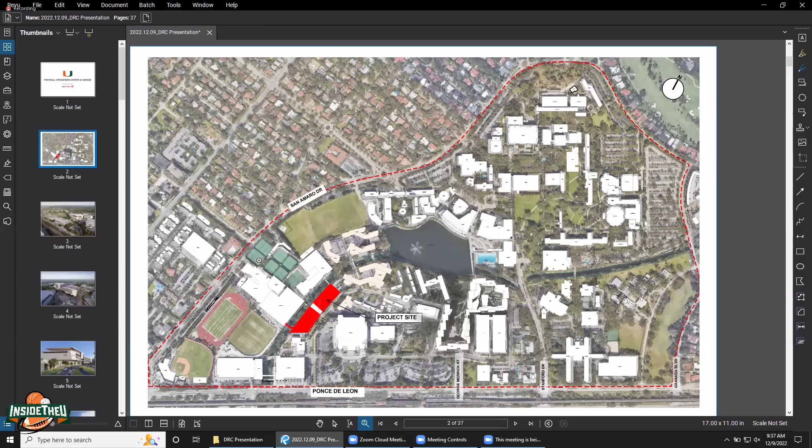So it's a very unique location, and it's a primary thoroughfare between offsite campus living and bringing those students to the campus. For us, it was an opportunity to create a visual connection or gateway, not just between the athletic side and this building, but also something that felt welcoming to students and pedestrians. Over time, we're trying to make the building or the campus as pedestrian friendly as possible, and this is another way of doing that and emphasizing that connectivity.

The other thing you'll note is that we are creating a physical connection back to the indoor practice field. That's something that is critically important for this project to function, being able for the student athletes, the football players, to directly connect to indoor practice football and the outdoor fields.

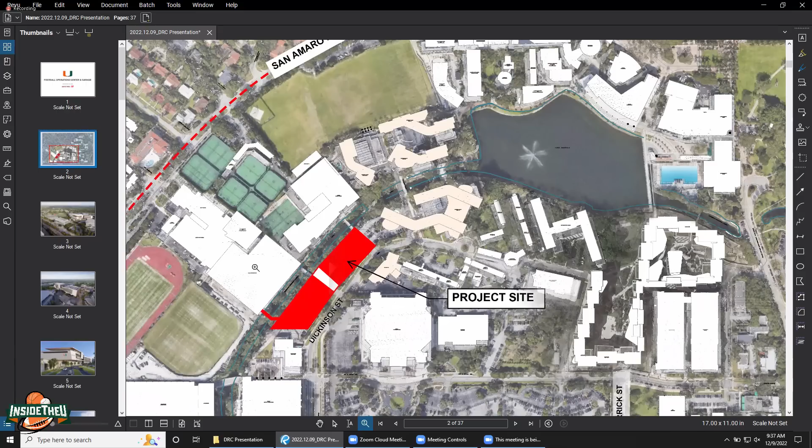Traditionally, a building like this, which you might find on another campus that has a whole lot of space, would be a 1-story or 2-story structure that's very inward facing. A lot of the things that happen in this building are very private. We had the unique opportunity to ask, what if we take this building type and go vertical with it, creating something that doesn't take up as much space, allows the campus to remain as green as possible, and somehow expresses what's happening inside while still creating a sense of privacy from the public realm on the ground floor.

Here you can see the building in context. It's the football admin building, which is this component here, and the adjacent and connected parking facility and athletic dining. For us, this really is a single project that straddles that thoroughfare and creates that gateway, and you're going to see some of that in other imagery I'll show you.

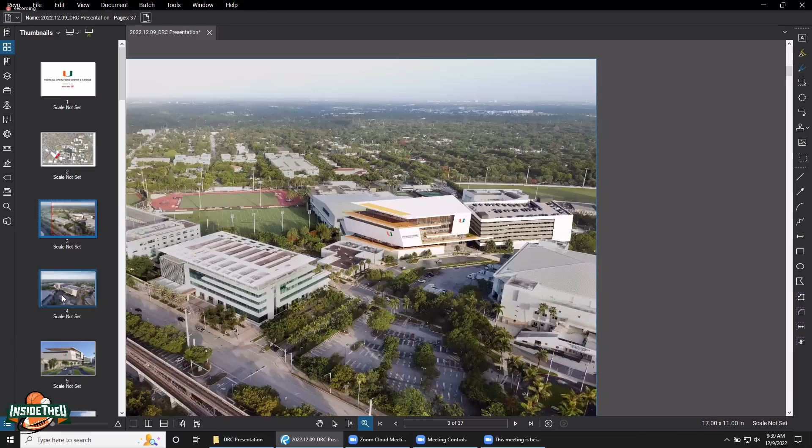In terms of scale and proportion, it is very similar to the neighboring buildings, very similar in height to Lennar. There was also an emphasis from our team to create a building that was connecting the inside uses with the outdoor spaces, allowing light to come in but also protecting the interior of the building from heat gain, from rain, etc.

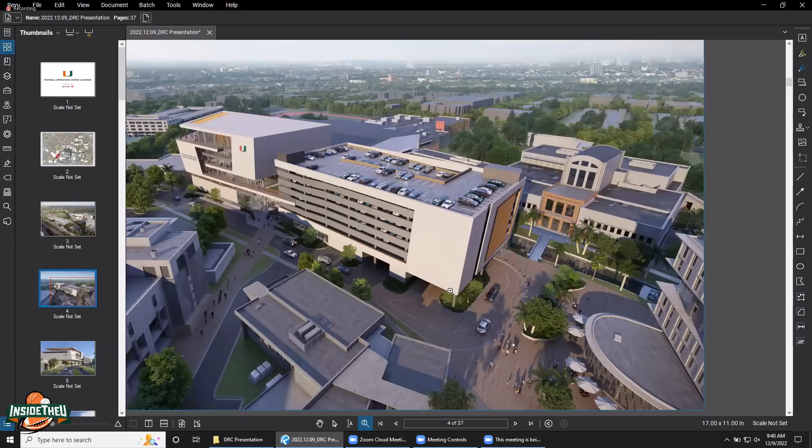This building sits primarily on Dickinson off of Ponce de Leon, which leads into the site. It's going to be connecting to this future plaza that will be an arrival and drop-off for Centennial Village. It's also going to provide access to the Wellness Center and the future home for theater arts in this area. This is being treated as a plaza and a drop-off space, and part of the garage will help in making that space covered and protected from the elements.

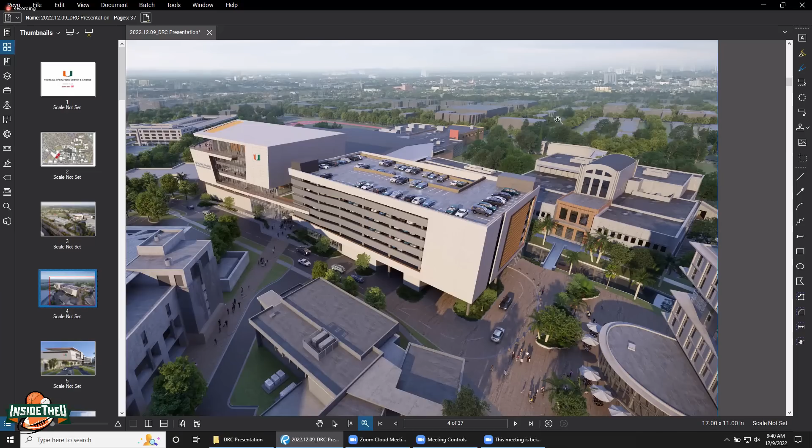You can see compositionally how the building really does reinforce that pedestrian connection that I keep referring to, so students coming from this portion of the offsite student housing have this direct line of access and connection.

From Dickinson Drive, another goal we had for the project was, while the building is set into the campus, we wanted to make it feel like it had a presence on Ponce de Leon. You can see the building has a very dynamic character to it, kind of leaning over and creating a sense of arrival all the way back from the entry of Dickinson Drive off of Ponce de Leon.

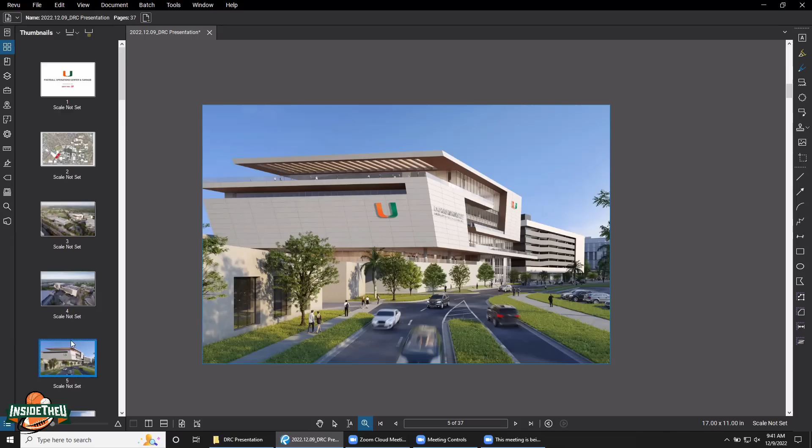You can see a lot of those key components we're talking about: that open terrace that looks back towards the practice fields, that looks to the water beyond the city of Coral Gables, that strong pedestrian connection, and the openness we're going for on the ground plane to really draw people into this project and make it very pedestrian friendly at that public realm.

This is another view of that pedestrian connection. You'll see how we're using the landscape, this change of elevation that we have to do based on, as we all know, the updated FEMA maps that are rising. A lot of the projects we've done on campus recently are addressing this in a proactive way.

There is a slight change of grade that we're taking advantage of, creating these steps that lead into this promenade. To the left side, we'll have the public-facing entry of the football ops building with a lobby that's very open and connected to that view. That lobby will be the home for football.

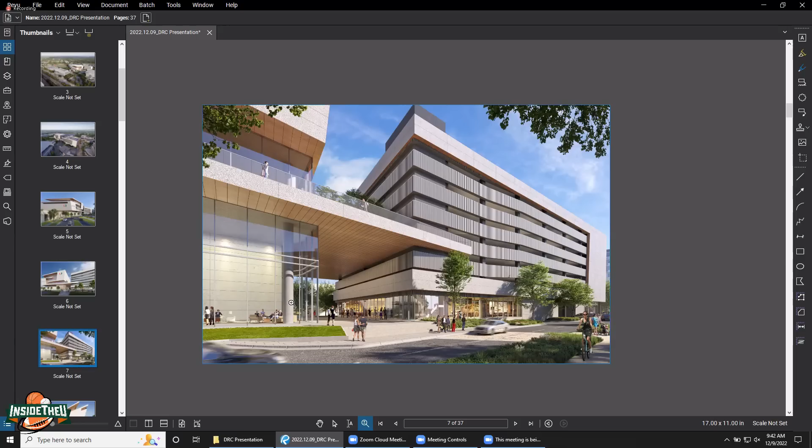You'll see a lot of the history of the football team and the success it's had in the past and its ambitions moving forward. The reality is, the University of Miami is trying to catch up with the balance of the schools nationwide to create a world-class facility. A lot of what's being housed in this building is what the university needs to become competitive in the landscape of football.

To the other side of that promenade, you'll notice the dining hall and that access to the vertical connection, which is very visible and open. This is where all student athletes for the entirety of the University of Miami will come. It will be open for breakfast, lunch, and dinner.

So it's open all day. It's not a dead space, it's going to be very active. Throughout the day, you're going to have activity on both sides of this promenade. It's going to create a space that could be used for other functions, potentially on other days, because it's an outdoor covered space. As we know, that's a commodity within the campus and within the city of Coral Gables, to create outdoor spaces like this.

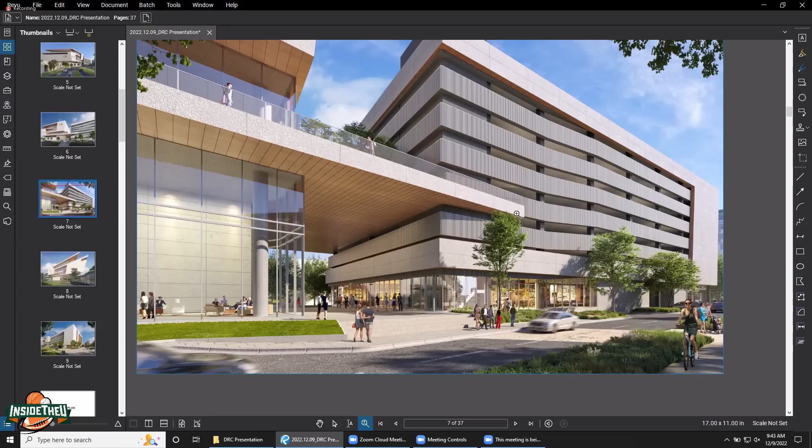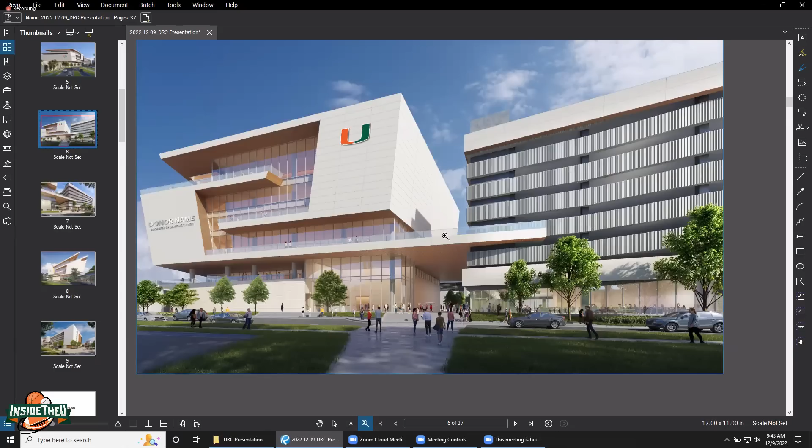As we also mentioned, the garage itself does have a physical connection. So while we are creating this intersection of this building, you can see the movement and how these pieces interlock and interrelate to one another. Not only does it help us create that pedestrian thoroughfare on the ground, but it also helps us create this elevated deck, which is a private connection for athletes and staff to connect to that football building.

While the building is addressing Dickinson, which is primarily the front side of the building, we're also wanting to treat the canal side in a very similar way and take advantage of that waterfront, which we think is a unique opportunity. So to the right of the page here, you'll see this pedestrian connection, an enclosed bridge that connects the student athlete, the football players, directly to the indoor practice field.

That is a private connection between their football building and their facilities on the other side of the canal. That will only be used by football players and staff. But again, you can see some of that visual connection that I've been describing.

The vertical circulation is something that we're expressing along the facade, taking opportunities to bring light into the building while still balancing that with some more solid areas that allow us to have some of those more inward facing spaces that are required as part of the programming here. So it's a balance of those.

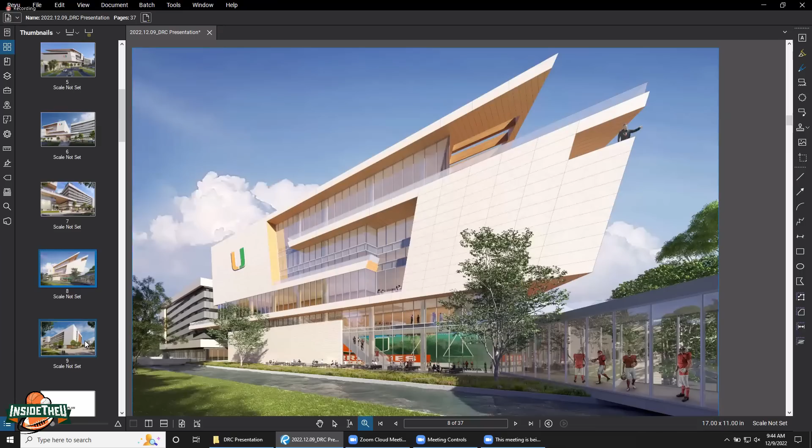On the ground level, you can see how we're extending some of those player recreation spaces to the exterior to create outdoor dining and lounging opportunities directly on the waterfront. You'll notice here as well how some of these balconies and terraces provide those opportunities to visually connect back to the existing facilities, such as the outdoor fields, Cobb Stadium, the indoor practice field, et cetera.

Lastly, as part of these renderings, we're showing you the other end of the project, which, equally important, is facing the plaza, which is going to open up to that portion of the campus that's a bit more connected to different types of buildings. So here you can see the Wellness Center. You'll notice here that we have vertical circulation that gets us in and out of the parking facility with clear visibility and direct connections.

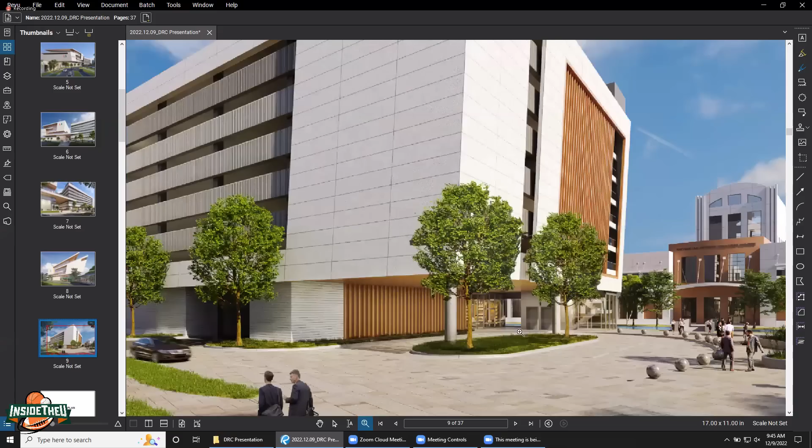Something else that we thought was important was, could we potentially introduce some programming at the base of this building that activates it, not just for the student athletes, but for the balance of the campus? You'll see here along the waterfront and at this location, we have been able to introduce a small little cafe, what we call the Ventanita, which will be able to serve coffee and provide access and additional active uses at that ground level where we can.

Off of Dickinson, we have direct entry before arriving to the plaza into our parking facility, which houses about 568 vehicles on 8 levels. The football building is a 7-story building.

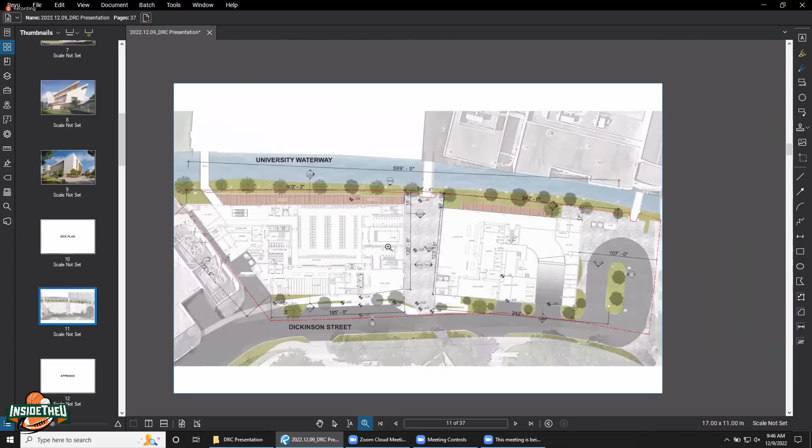Getting into a little bit more of the specifics on the site plan and walking through that in more detail. So as I've described, this is Dickinson. This is really the only street where we have access to service this building and vehicle access.

What we're doing is piggybacking on the fact that we've got, to plan left or plan west, which is really the southwest corner of this project, the loading and back of house area, service and mechanical spaces for the Lennar building. We are using that to bring in trucks to provide our loading area directly for the football operations building.

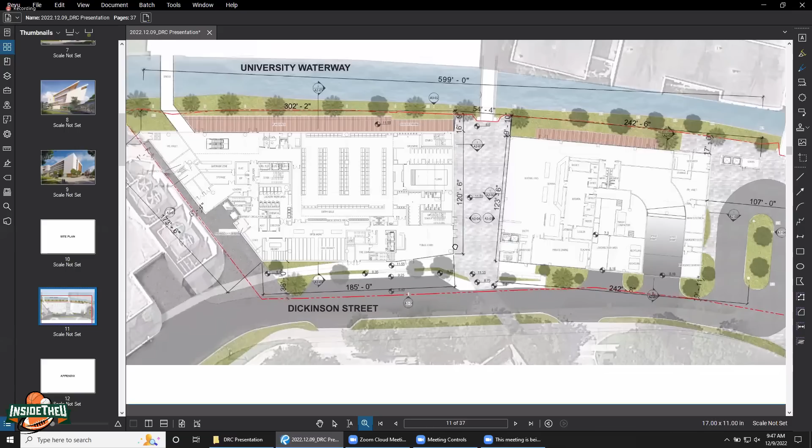As I mentioned before, there's a strong emphasis on this connectivity and creating this outdoor space. It's a very open and generous paseo. It's over 40 feet tall and about 40 feet wide. So this is a kind of grand scale within the campus.

Here at the corner, we have that completely open and visible public lobby, which is going to create that visual connection between the football program and the students that are going to be coming through here every day. As you can see in the corner, we've got a very open vertical circulation core that's going to be glazed with visibility.

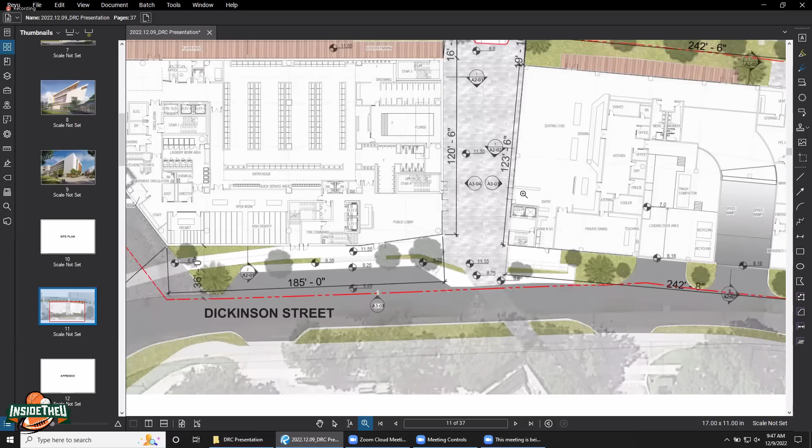And then also the balance of this is all glazing that allows views into the dining hall, which I described is on the opposite side of the paseo. All of this is flush. We gently rise up to this area and then we slope up to this area based on the new FEMA flood requirements.

As I mentioned before, on the north side, or plan north, of this project, we've got an extension of those interior spaces to the outside. We've got an extension of the dining hall to the canal. We're set back so that we have enough space for the balance of the canal going into the water.

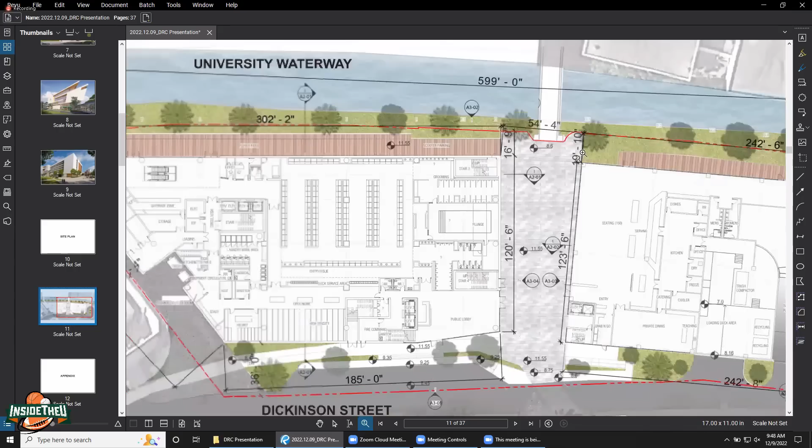Some of this might be a little deceiving. It looks like there's a big green space, but really that's the embankment of the actual waterway. So we're taking advantage of that and creating these outdoor spaces that are extensions of the functions that are occurring on the interior.

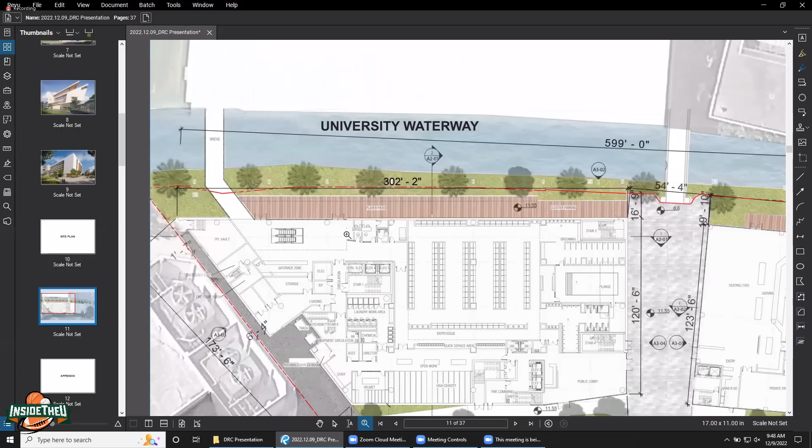This is that vertical core that I showed you in that rear rendering that connects you back to the indoor practice field and the outdoor practice field. So players cross this bridge and go directly into the locker rooms, which have to exist here, or up into the meeting rooms where they prep and study film, et cetera, and prepare for games.

The balance of this on this side, there's a speed ramp here. So we're trying to use maximum utilization of that ground floor for public uses. The only other things that we have on the ground floor are the service areas that are required to be here. So we've got a loading dock that directly feeds into this kitchen, which is a necessity.

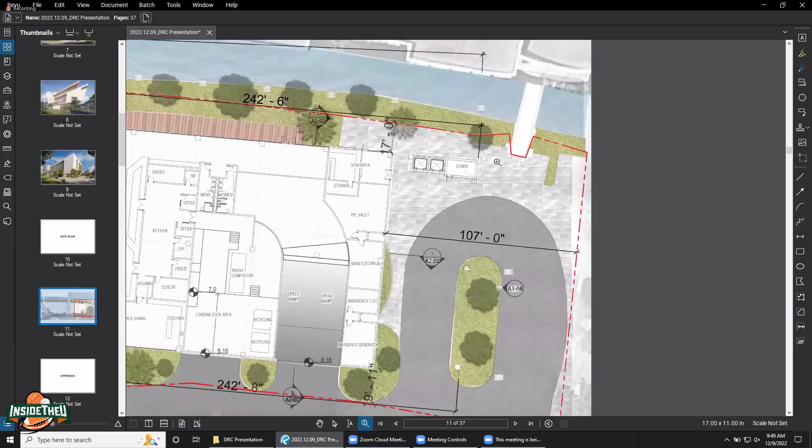Our trash and recycling, all of that is completely concealed and inside of the building. And then we've got direct access to the parking in and out, and all of our other utilities along this side, with the exception of the ventanita that we thought was a nice way of activating that waterfront. As people come in and out of the garage, they've got the opportunity to use that space as well. And again, connecting back to the wellness, all of this being expressed as a plaza.

So I feel like I've been talking for a long time. I can stop here and then open it up for questions, or I can continue to get into more specifics in the plans or any zoning information.

Up to you all. I think for the benefit of the public, if you could go through not each room, but generally what's on each floor, just so people understand what the uses are that are being proposed.

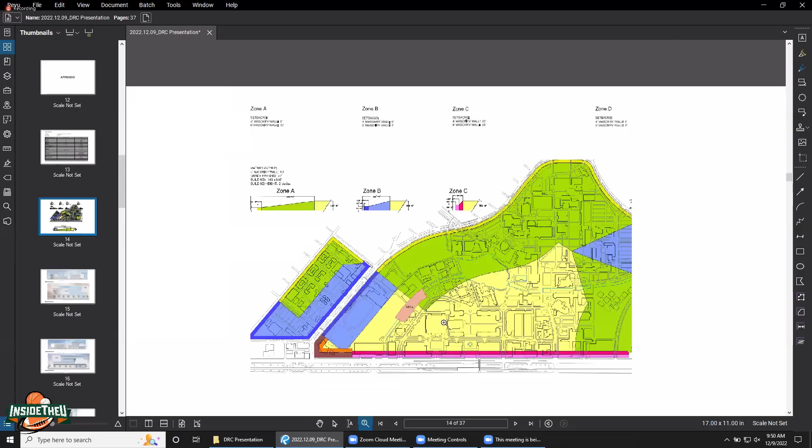Absolutely, I'm happy to do that. So I'll just quickly show this slide. This is where we sit within the balance of the campus. Obviously, these are the heights. We are within the heights that are allowed. So this diagram is basically saying, look, we're in compliance with all of that.

We've included some elevations in the submission, which a lot of you have seen, so I won't go through these in detail. I've explained that in the perspectives. But just to talk a little bit about the building and how the building functions.

This is the public side of the building. This is kind of the more player-focused side of the building where they connect to some of those uses and practice, et cetera.

So on the ground floor, players are able to arrive if they're coming by foot, if they're on campus, if they're in a class, they're able to arrive at this level. They've got direct access to their locker room, which is the first place they go. If the public enters the space, they have the ability to go in a different direction. So those two paths never really cross.

You've got the private side of this building, which is for the most part how this building functions. And then there's a few spaces that are a little bit more kind of public facing, media oriented, et cetera. And all of that works off of this lobby.

So on the ground level, we've got the locker rooms, we've got the shower areas, some plunge pools in this area, restroom facilities. This is where all the equipment that they need on that ground floor is kept. So as they're getting ready to go out to practice, they're picking up their equipment, or when they're coming back, they're dropping off their equipment. All their equipment is serviced in this area.

The importance of this is always as well to be able to have direct access to the loading, because as they're making their way to games, this is where all of this stuff is making its way onto the truck and making its way to the stadium.

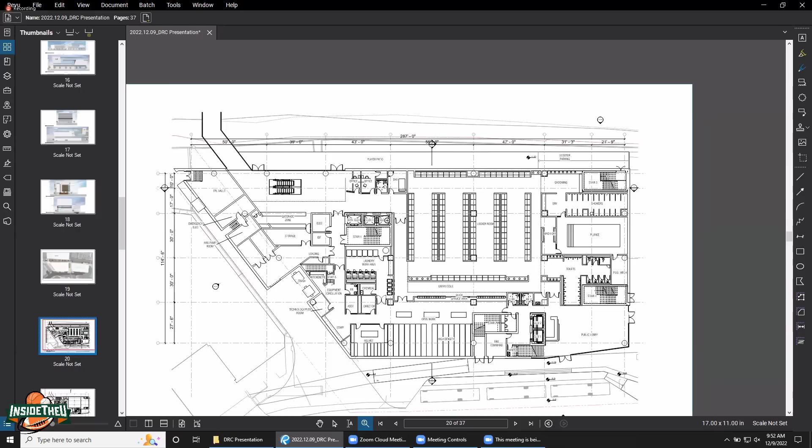This elevator over here is on the public side of the building. On this kind of mezzanine level, what we've got is access to this mezzanine space.

There's a space here called the Hurricane Room. This is primarily for media and recruiting. It's like a 360 experience where when they're bringing in players and trying to get them hyped up and wanting to join the program, this is a showcase of the university, their heritage, just getting them interested in the program. And then they continue to tour these recruits to the balance of the building.

The other functions on this level are an extension of some of the storage and service spaces that we need for the hydrotherapy that sits one level above this. Again, this is a mechanical mezzanine for the most part.

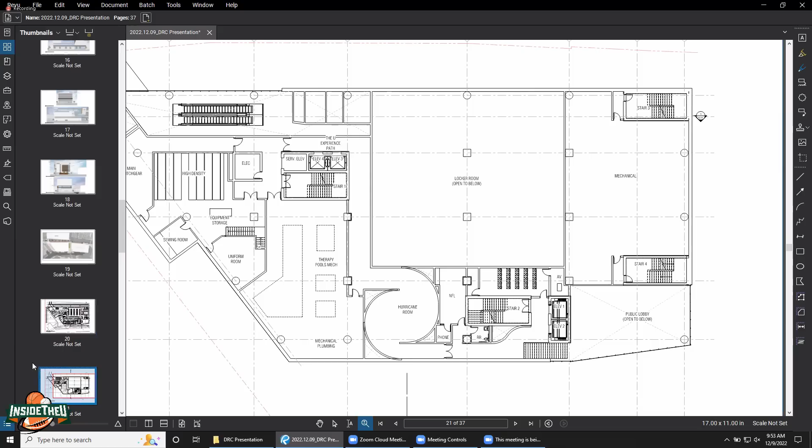The next level up, which is level 3, this is where we have sports science and rehab. So physical therapy, rehab, all of that is happening on this level. Players have direct access, if they're coming off the field or going to the fields, to take these escalators or elevators up to this level where they're getting treatment.

They've got hydrotherapy as well, and they have a spa. We were having some conversations earlier today.

These days, these facilities are kind of world-class, and it's no different than going to a 5-star spa. The amount of things that these players need to be able to perform, it's changing. So all of that's happening on this level.

Continuing up on the player side, if you take the escalators up, this takes us to the level where we have all of our meeting rooms. This is where they prepare and study film, etc. So players are coming down from that level up to here, and this is where they're doing the bulk of their studying indoors.

In addition to those spaces, they've got a simulation room, which is kind of like an indoor small field, a little bit bigger than this space that we see here, where they're going to have video and they're actually able to watch video and kind of line up and prepare. Very state-of-the-art space.

This is the level that actually connects directly to the parking facility. So players are actually able to, if they're parking here, or staff, coaches, etc., they're able to cross at this level and enter the building and go up or down depending on where they're headed.

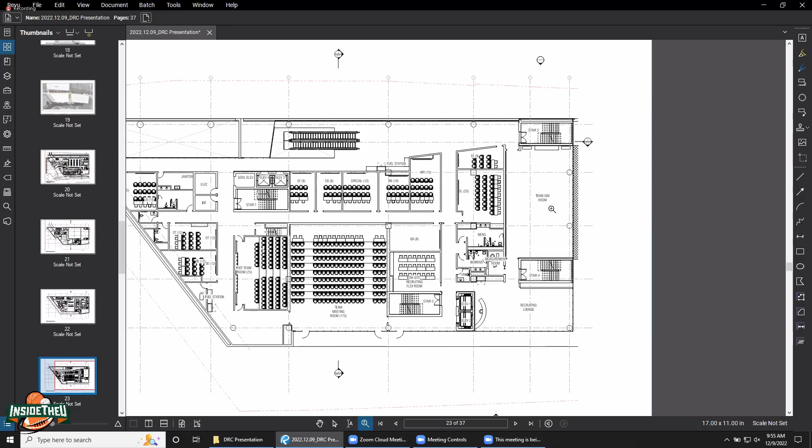This is also where we have a recruiting lounge, and we're using that sim room for double duty and also that outdoor space. So that outdoor space is an extension of the sim room to the outdoor area. So if they want to host something here for a recruit or a large recruiting function or something like that, all of that would occur on this floor.

As we make our way up, now we're getting to the more staff and coaching portion of the building. For the most part, this is staff and coaching locker rooms and restroom facilities. There's also some additional office space for some of the components that support the functions for the football operations.

And then lastly, on level 6 is where you have all the coaches' offices and additional open office space for the folks that support those coaches. You can see here, the perimeter is lined with those coaches' offices. There's a terrace that looks back towards the fields. This is the head coach's office and all of the other coaches on this level.

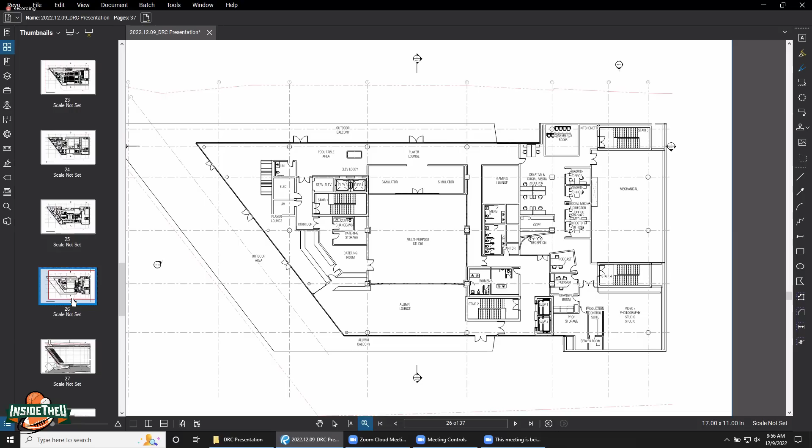As we move up, lastly, to the rooftop, as we mentioned before, the rooftop's a unique opportunity here in the city of Coral Gables, also the city of Miami, to be able to take advantage of our weather and to be able to capitalize on these views that we have back to the city. So creating an indoor and outdoor space that work in tandem and feel really open and connected.

You can see here, this is really player focused. They've got an indoor space here that's called a multi-purpose studio that might double up as a basketball court. They've got a gaming room. They've got a simulator, pool tables, all the things that these players need to kind of take their mind off of the game, relax, and just sit back and take it easy.

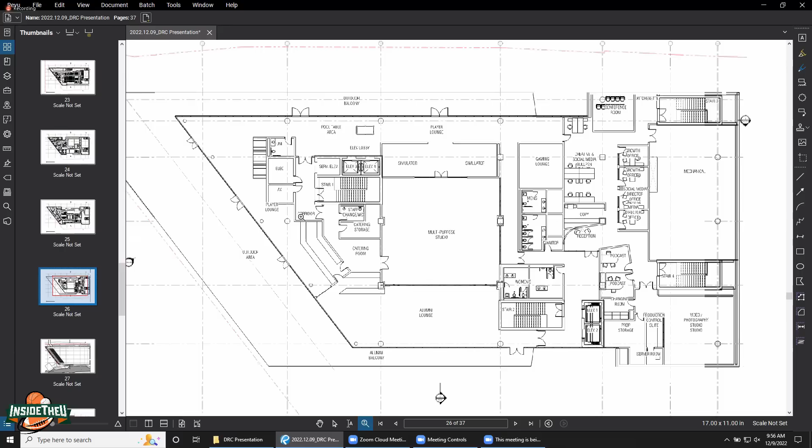And all of that extends to the outdoor space where we have the same kind of outdoor lounging and open areas as well outside.

That is the entirety of the football building.

Now moving over to the garage or parking structure, on that ground floor, as I mentioned before, this is where we have the athletic dining for the entirety of the campus. You can see that the bulk of this area has direct visibility to the outside, taking advantage of that waterfront, opening up to the Paseo, and having a nice presence on Dickinson Drive.

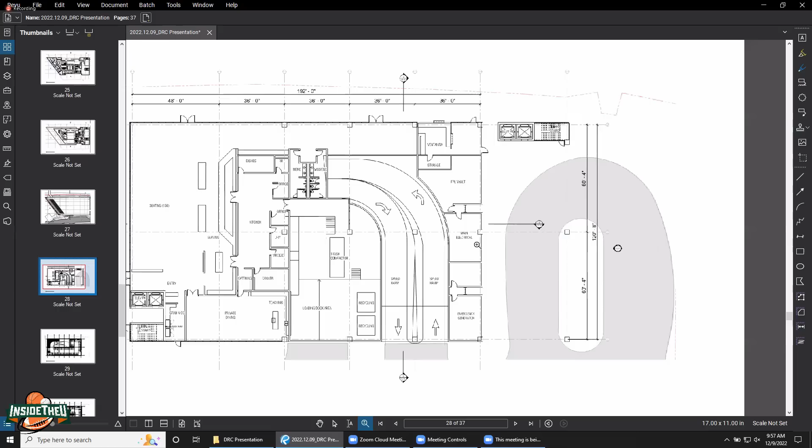It opens up, with two main connections for circulation: one conveniently located to service the wellness center and this planned east part of the campus, and another on the southwest corner, directly across from the lobby, also providing easy access to Watsco and that important pedestrian connection.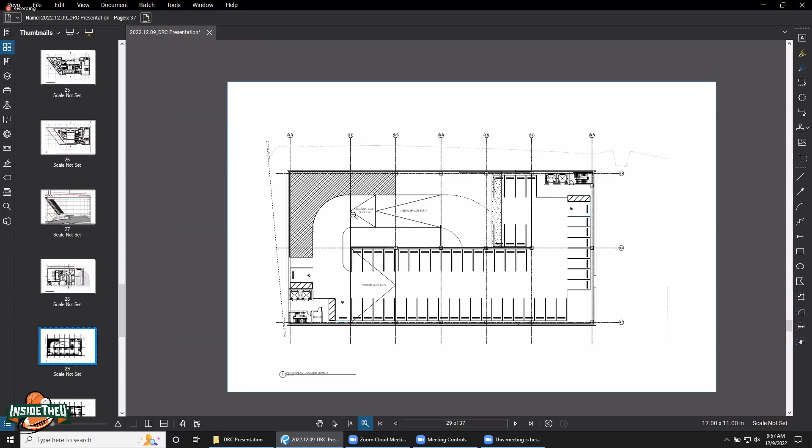Above that, we've got a pretty traditional garage. It's a sloped parking garage that makes its way up. It's about 8 stories and holds just under 600 vehicles, about 568.

These are some sections of the building. And I think that is a comprehensive overview of the project.

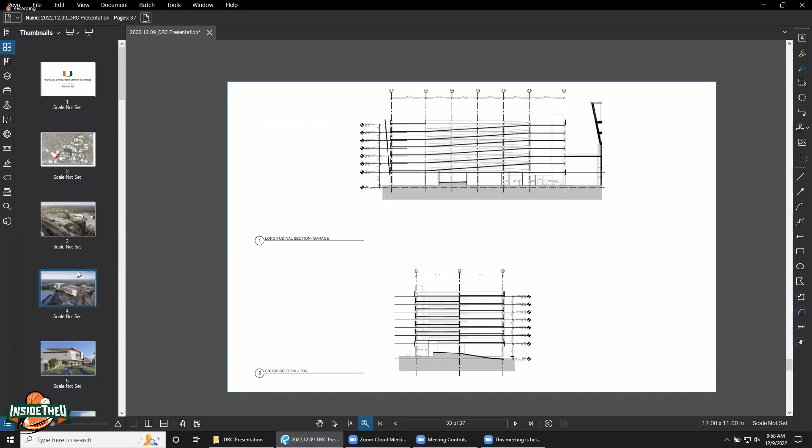Good morning, everyone. First, let me congratulate you on a beautiful building and a beautiful presentation. The drawings are really at a point where we can understand them. We've had several meetings with you, and I think it's developed in a positive way. You've opened up a lot of the building and addressed some of the comments we've discussed, so thank you for doing that.

I have some comments I'd like you to consider moving forward, because after this, as you know, we're going to go to the Board of Architects, and there are always some basic requirements you need to know and bring to that meeting.

My first comment is a large scale comment addressing the campus. I don't see a master site plan that shows your proposed building with the other projects we have online right now, number one being on the north side of this site, the Siskovich residential large scale development that's underway, and also on the east side of the property, the Ronnie Mateo building. I think you need to prepare a drawing showing the integration of your building with these other two projects, which are already set in stone, and how your project connects to them on an urban scale. I think that's very important.

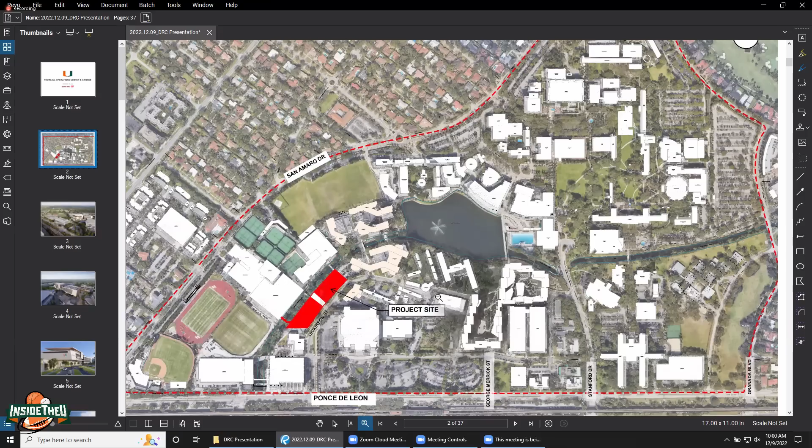One concern is the trash area or service area on the south side of the building. As you drive on Dickinson and make that subtle right-hand turn, you're looking directly at that service area. I don't know if there's a way to screen that more, maybe to minimize that radius. I know you've got trucks backing in and out, but I'm concerned about that sight line, and I need you to review that further.

Also, on sheet A102, you have what appears to be a cutout in the curb for buses, which I'm assuming is for loading the players on game day. That's always a fun activity, and a lot of people come to see it. I'm just wondering if there's been consideration of that function happening on the north side where you have the turnabout. I don't know if the buses can make that radius, but I thought it's a great open, covered area that would give us more of a forecourt in front of the building.

I just feel that area is really tight. You have a vertical 6-story building 10 feet away from the sidewalk, and then you're introducing the function of buses, players loading, the public coming to see it, and kids on campus trying to interact, celebrate, whatever it is they do when that function occurs. So I think it's a fun activity, but I just think that location may be too tight for that. That's a consideration.

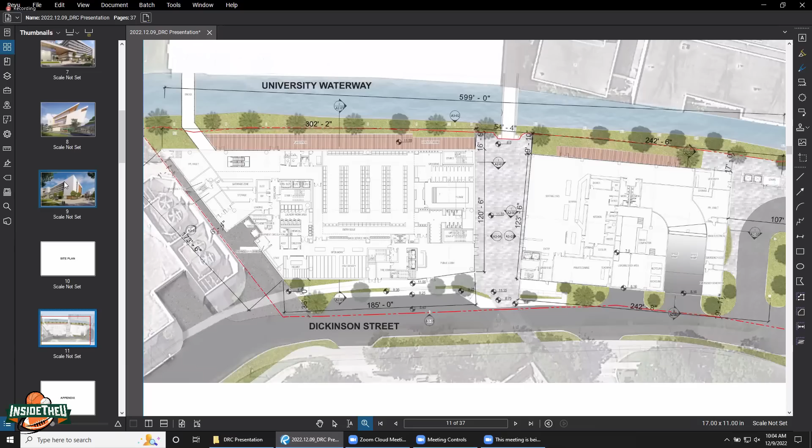All right, and then going to the north side of the north building, again, the covered drop-off area. I know you mentioned something about ventanita, and I think we've had this discussion before that to me, the north side of the parking structure is very, very prominent based on the Siskovich project that's happening on the north side. I think we really need to activate that. I see the intent, you've done a couple things that are helping that, but...

There's no porosity, it's just materiality you're changing. I don't see any openings. But I'll make just, if you'd like to talk about that, or...

No, I'm just going to—I don't want to delay the meeting because this is technical more than I hate to get into design issues, but... Sure, that's what we do at BOA. So, I'm just giving you my thoughts, and then you take it from there and you guys assess it and develop a strategy if you think it's applicable or not. Thank you.

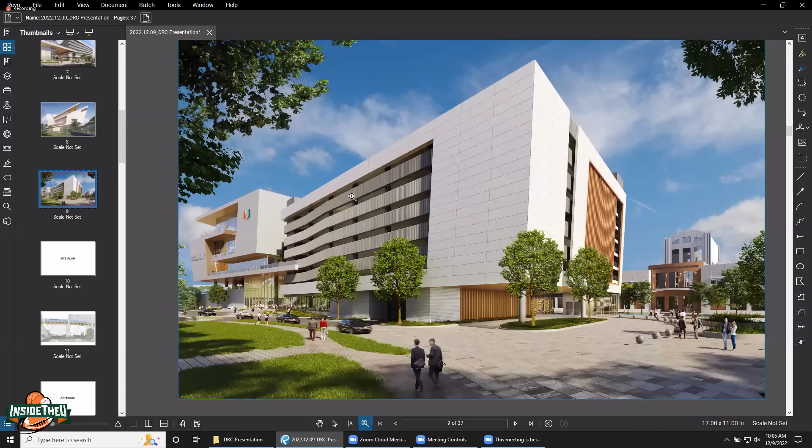If you can enlarge your building sections, they're great. I think they show a lot of interesting things on the building, but it's such a small scale it's hard to read. So I would probably double the scale of the sections to try to emphasize the three-dimensional aspects of the building. I think it's great what you're doing.

Then, provide a typical wall section that shows the structural system, the panels. I know we talked initially about ACM panels, now it looks like it's a precast system, so that's going to be a question that's going to come up in the board in terms of materiality and how you're doing this.

Also provide us any kind of details for any architectural features, maybe the storefront system, the railings, things of that nature that are going to be atypical. The board is going to question you on those elements, so if you could get ahead of that, that'd be great.

You need to submit a material board with all the finishes—I think we've discussed that previously. Also, I don't see any indication of exterior lighting or how you're entertaining the uplighting, but I know you're going to be doing that. That's something that's come up on the board too, since a lot of buildings being developed today have a lot of exterior lighting, and the board needs to understand what the concept is. Maybe provide, if you can, a nighttime rendering that shows the intent of what you're trying to do with this building at night, if it's a feature.

If a lot of buildings don't have it, but I'm assuming a building of this nature is going to be celebrated. So that's something we're going to look for.

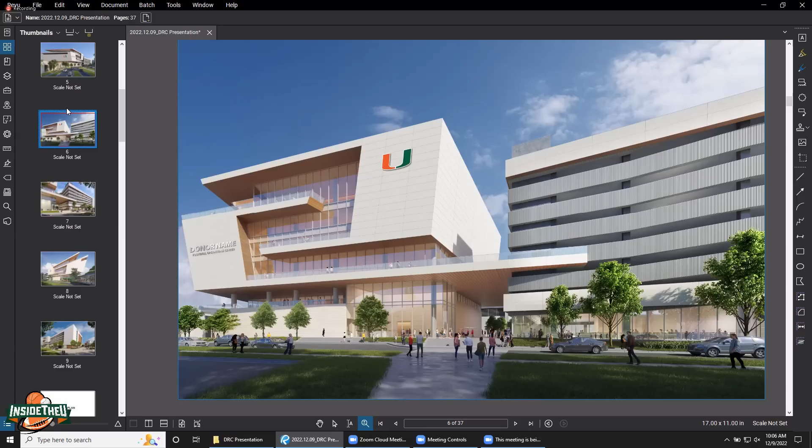Here's my final thought, and it's tough to deliver this because you've gone a long way on a concept, but my biggest concern is going back to the urban fabric and context of the university. The south side of the property abuts a service area for an adjacent building, and you've chosen to create balconies and overlooks on the south side. Then on the north side, it abuts the Siskovich project, which is a large residential building. I'm just wondering what generated the thought pattern to put the parking structure on the north side and the football building on the south side, when it would almost make more sense to invert that — put the football function on the north side where it relates to students and activities, and the parking structure on the south side, which relates more to the service functions it's abutting contextually. That's just food for thought.

That's a big one. I know it's a big one, and I want to engage you, but I don't want to go there here. I failed to say that in one of the prior meetings, and I've held back, but I can't hold back — I've got to say it. So I'm just putting it on the table. You guys take it from there, and that's all I've got.

All right, thank you. John, parking? Nothing.

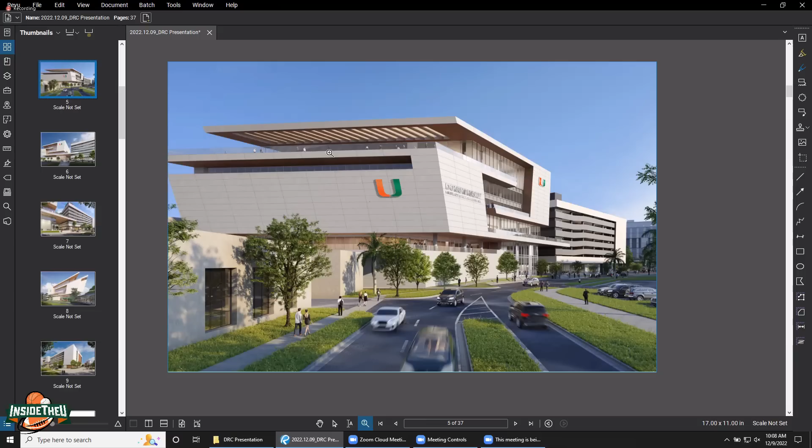I really mirror what Juan said — the architecture is really dynamic. I can't help but appreciate those two interlocking U's in the facade, University of Miami U's. The University of Miami knows how to do really nice landscapes around buildings, beautiful campus. I know you'll do a wonderful landscape plan for us to review.

Existing conditions, I believe, is a parking lot with some existing trees, so we'll look for a tree disposition and mitigation plan, and a tree protection plan if there are any trees to protect. When designing your landscape plan, make sure you meet the street tree requirements — we're going to look for shade trees along pedestrian corridors at an average spacing of 35 feet on center throughout the street. Make sure that's met, and we want shade trees, not palm trees.

Make sure you have all the proper tree infrastructure below pavements. Where you have trees, we're going to require at minimum structural soils for small and medium-sized trees. Large trees like live oaks or mahoganies will need Silva Cells below pavements so the roots have space to grow and don't pop up pavements. You'll appreciate that for maintenance later on.

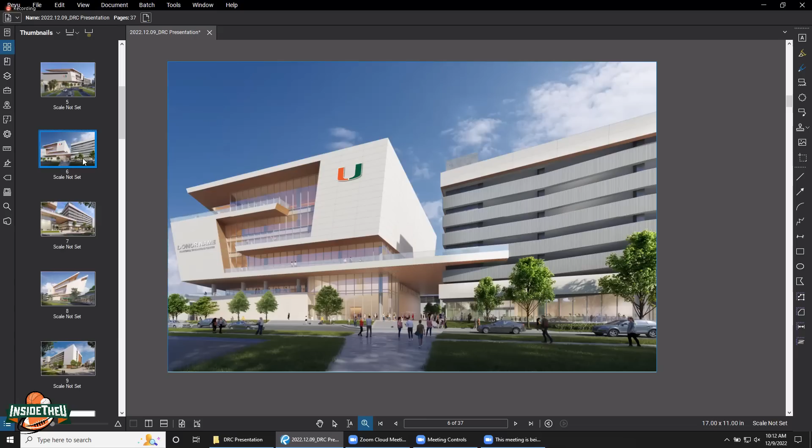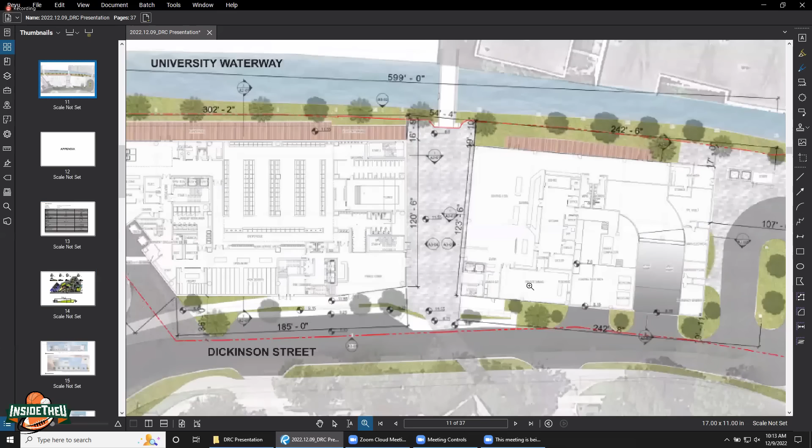You also need a 14-foot vertical clearance where rolling waste management containers are involved. So it also looks like you have a service area that you may have intention for. I was looking at A101. Let me go to that drawing.

It looks like you have another area shown there as a loading dock. So I don't know if you have any intention... oh, there it is, I can see it saying recycling there. So you have the intent that you're going to have waste pickup there, but do you have smaller rolling dumpsters also at another portion at your roundabout outside? These are elevators, my mistake. No, all of the trash collection is here.

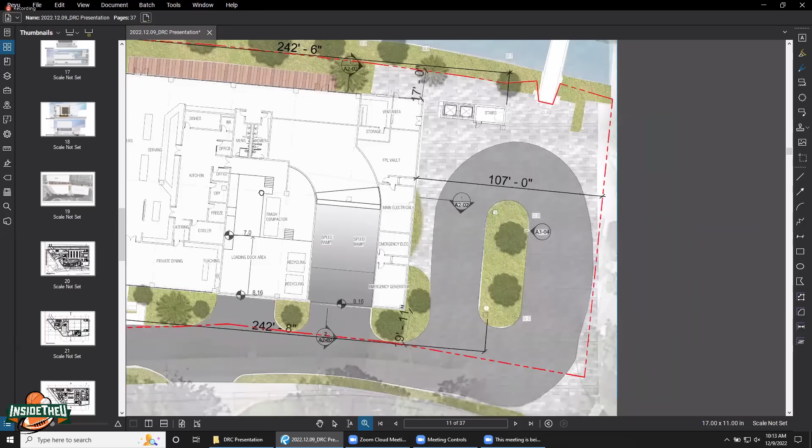That's good, that simplifies life. I'm going to delete the portion regarding the pavers and the curb since you don't have that issue. Please look over the calculations, make sure you have the vertical clearance necessary, and coordinate with the sanitation department. We have a specialist from waste management who works closely with us and is very insightful and can help you determine different possibilities. Instead of massaging your building, you may have other options you can use, but it would be good to have that conversation early as well.

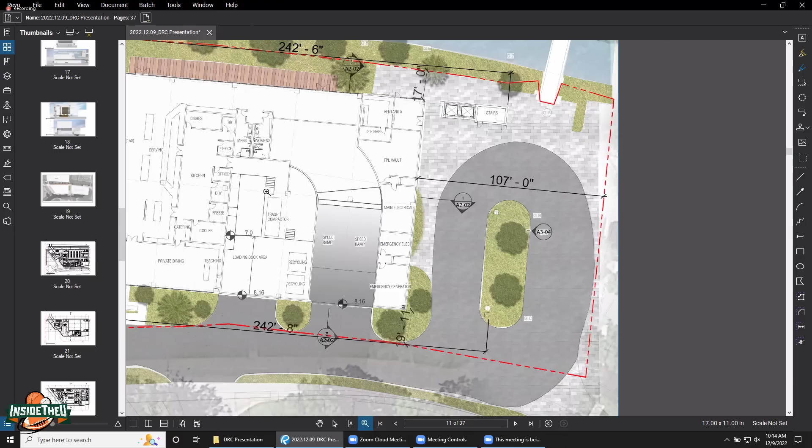The last comment is just very general. Comments provided are preliminary, as are the plans submitted. More comments may apply. We don't foresee much because you're within private roads, within private property, but whatever we're doing at this point is more to be helpful. The big stopping point would be the part about the sewer flows.

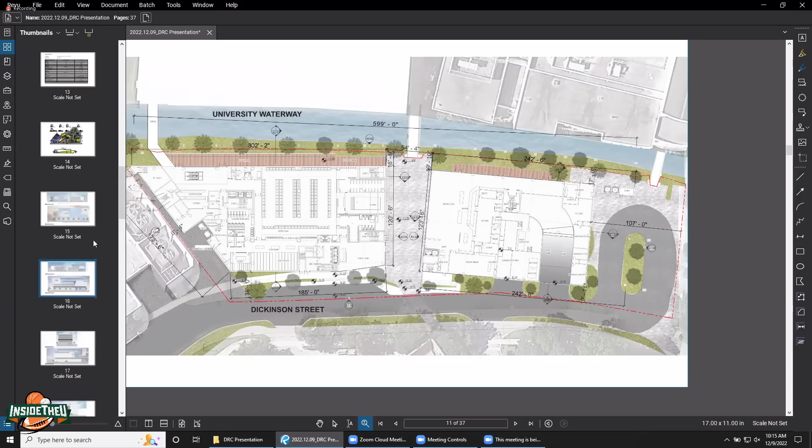Arceli Rudila, zoning administrator. In your zoning data, can you please include the location of this project with regards to the sub areas? I know it's in the campus core area, so if you can add that into the table. And for the purpose of calculating the height, can you also include the distance from San Amaro to the building? Also in the zoning data, can you include the green building certification path that this project is intended to achieve?

You are also required to do EV parking. I don't see that. There's a minimum of 5% EV ready, and then 15% and 20%. I can give you the table, which will be provided later on the app. So that's all I have.

Warren Adams, Preservation Officer. This new project is very close to Pentland House, which is a historic structure. However, I believe the new theatre building is going to separate the historic structure from this proposed one, so I don't see any additional negative impact onto the historic structure.

Manny had no questions, noting that we had a conversation before the meeting and he answered my question.

I think we have Robert Nance on Zoom for fire. My only comment is, where's my fire truck accessibility to the buildings behind it? All the accessibility is now being taken away from this because of this building.

So we don't have to answer it now, it's a future conversation, but it needs to be looked at.

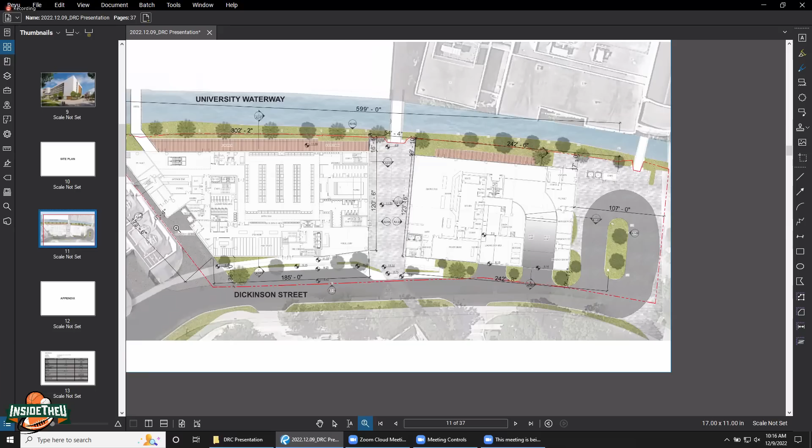I think that concludes all of staff's comments. As far as the process goes, you'll incorporate these comments, address them as appropriate, and then submit for Board of Architects review. At that point, they will approve with conditions, deny, or whatever they want to do, and then you move forward to permitting.